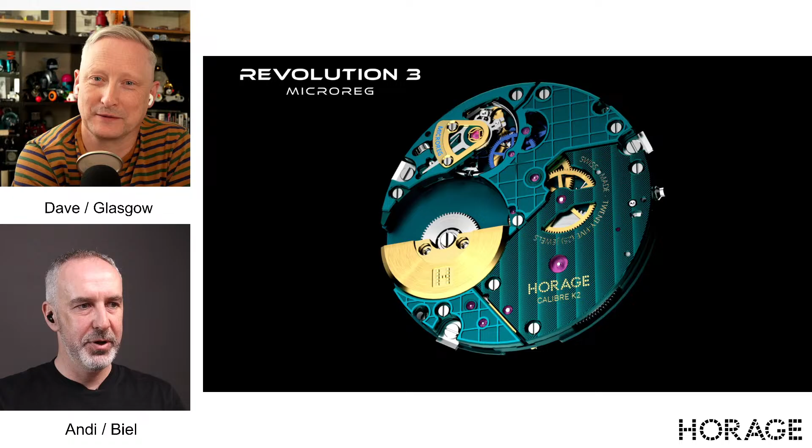So what do we overall look at today? I'm switching to the next slide. That's the watch I have here. You will see it live under my microscope camera. In the middle is this built-in MicroReg system, with this little prototype actuator. On the right side, we have a relatively mature design of the whole application, which you use with your smartphone - you put your watch on it and send an electric shock through the watch to adjust it as we want. Of course, you need to figure out first if the watch is off. We can't solve all problems for the rest of the world, but we can solve a lot of problems, I think.

Dave, how are you, you're in Glasgow at the moment? Preparing for our trip, I guess. Yes, we're getting ready to travel over to San Francisco to the Wind Up Fair, which is happening this weekend, Friday, Saturday, Sunday. We've got a few other little events planned in and around that main event while we're over there in San Francisco.

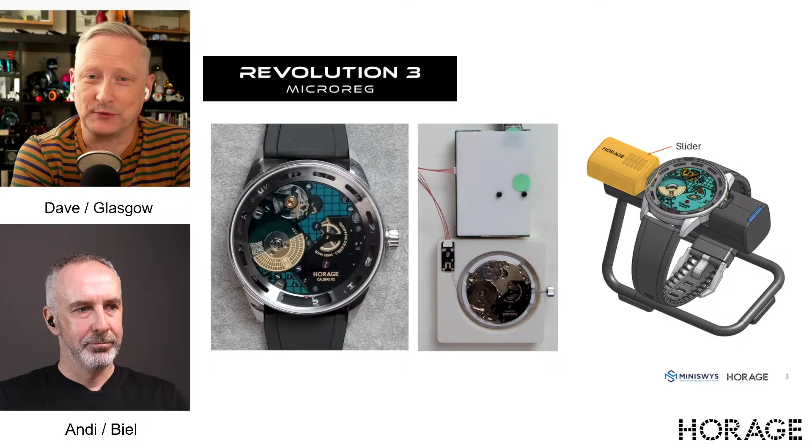But really today, what we want to do is get a good broadcast out about this update with MicroReg. As Andy said, we've moved on considerably in the last few months. We've been a little bit quiet, we've not said too much, but what we've managed to do is integrate all of the components we were looking to fully integrate into the K2 calibre. Previously, we demonstrated a proof of concept and a proof of application model, best described as a flatlay - it kind of stuck out the side of the calibre a little bit, but it showed everyone how it worked.

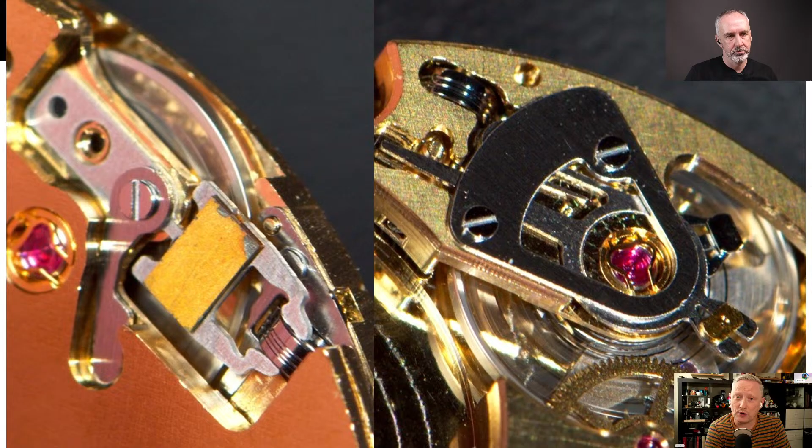We've actually been working hard with the engineers to fully integrate it into the calibre now as well. There's a couple of images on the screen of it. You can see on one side, the bottom, which is the dial side, showing the actual micro actuator - that's done by Miniswys, our partners in this. On the right hand side of the screen, you can see the new bridge piece, which will eventually have MicroReg wording engraved onto it. You can see the little swan neck regulator coming down there and the adjustment pin. This is all fully working.

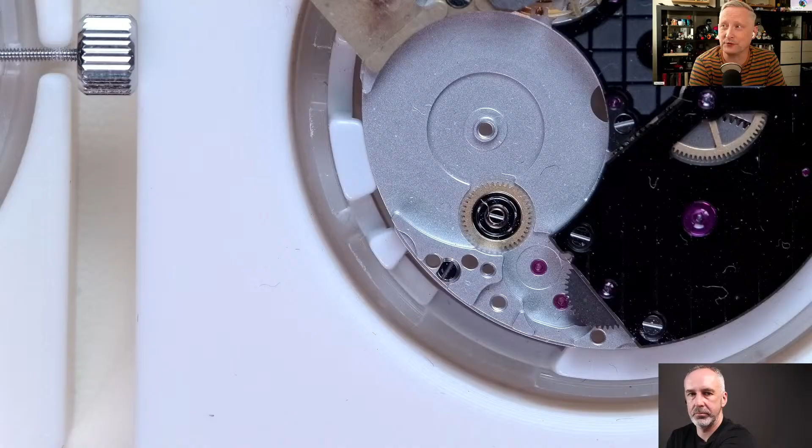When we first went live with this, which was last Thursday, that was around about a week after we finally got it fully up and alive. So it's just over a week old now, and it's running, but Andy has got the original concept here.

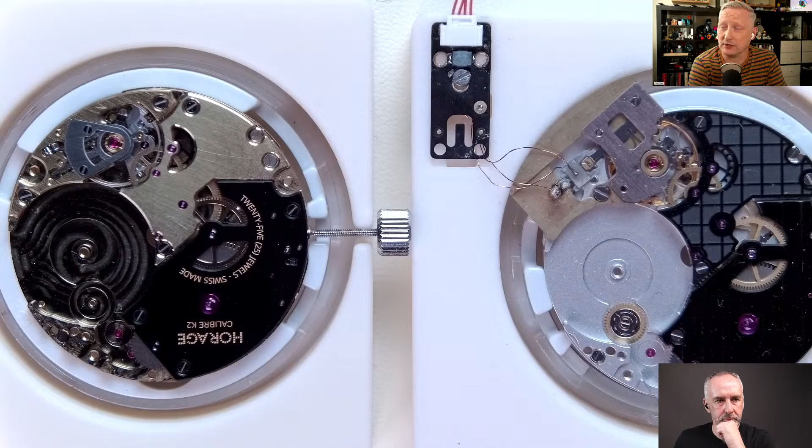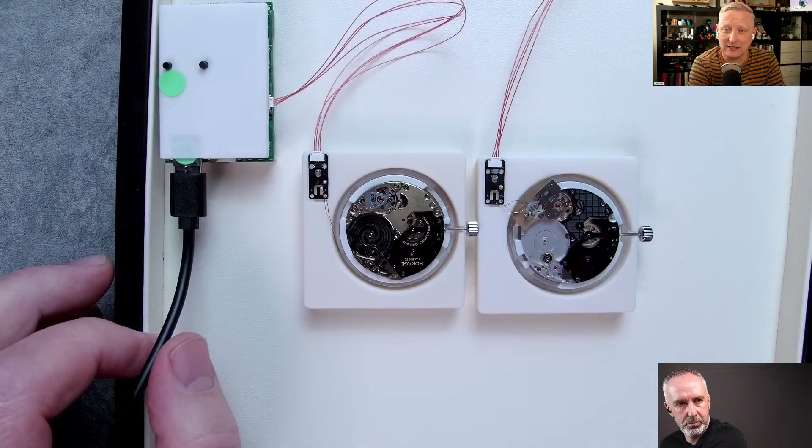And of course, with parts coming off design and being produced, we've got a few videos later to show some of those early components being made.

If my CPU can handle them. Let's not try and crash your computer. I want to be very careful with that, slowly, so we don't get kicked out, because I'm waiting for a new one. So what you see here, we're probably a couple of minutes late in starting.

This device up here is a prototyping device with a microcontroller connected to USB so we get our power. When I press that button on one side, it sends this shock as if it would come from external through a connecting system. Just for those who still don't believe it, there is no electronics in that whole system. It's pure mechanical magic, piezo ceramics moving around when they get a shock.

Best way to describe it: if you're looking at the movement or caliber on the left-hand side of your screen, the white square, pretend that's the case of the watch, and the tool up in the top left-hand corner is the interface which the watch sits on in order to apply the shock, which in turn makes adjustments to the regulation.

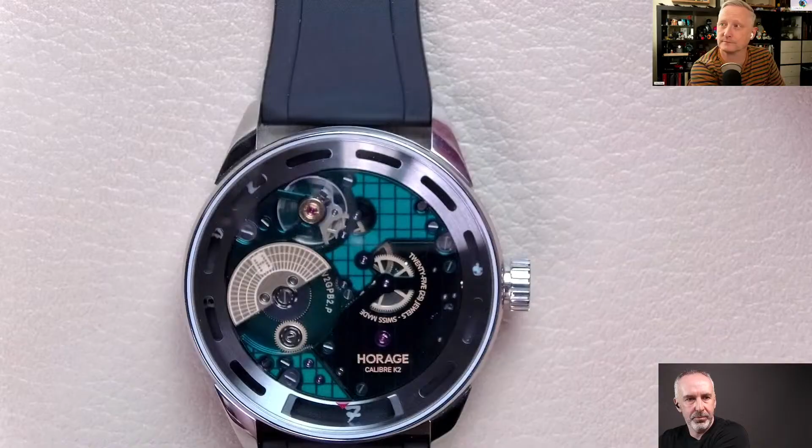That is, of course, not built in yet, because the main job right now is trying to figure out small details and improvements. Where do we actually have to have these cutouts? How can we make them bigger? Does everything fit in from the rear? Because it sounds like just a couple of hands and things like this, but at the end of the day there's still a lot of fingerprinting involved - sorry, let me clean that. These kinds of mechanical things need to work out properly, especially since it's always in daily use.

Here you can see this beautiful greenish-bluish finish, depending on how the light is coming. I think I have a little bit of yellow light here, that's why it's coming across a little more greenish. When you have colder light, it's more bluish. You can also look at it from a different angle here.

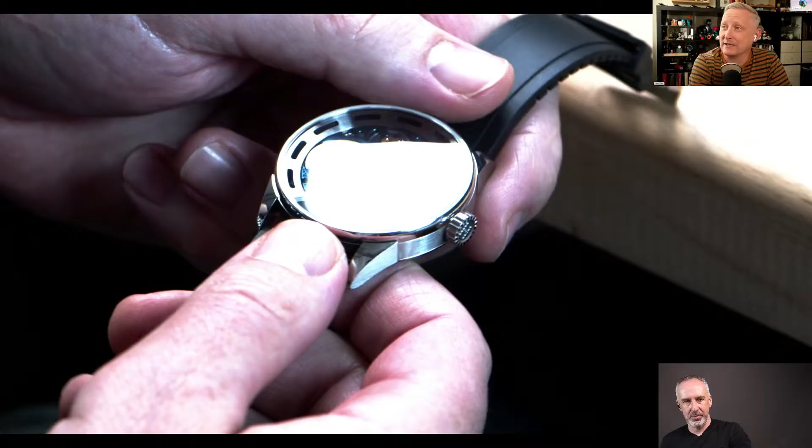What you're also seeing here is the second generation case. Here you see it's more bluish, depending on how you move it around - see the colors there, Andy? You're looking at the second generation prototype here. The prototypes we were showing earlier were the first generation case, but if you've got a keen eye, you may notice a few of the changes here.

So the interior rehaut ring, which has got these little cutout windows on it, is now in a mid-grey colorway, and it now has a nice angled slope coming in from the outer edge, sloping down slightly to the caliber, giving it a slightly more open feeling. The window at 6 o'clock, where you'll be telling the time, has a handwritten number 7 on this one since these are just prototype discs. We've now put a chamfer on either side of this window, which helps open it up, making it a little more visible.

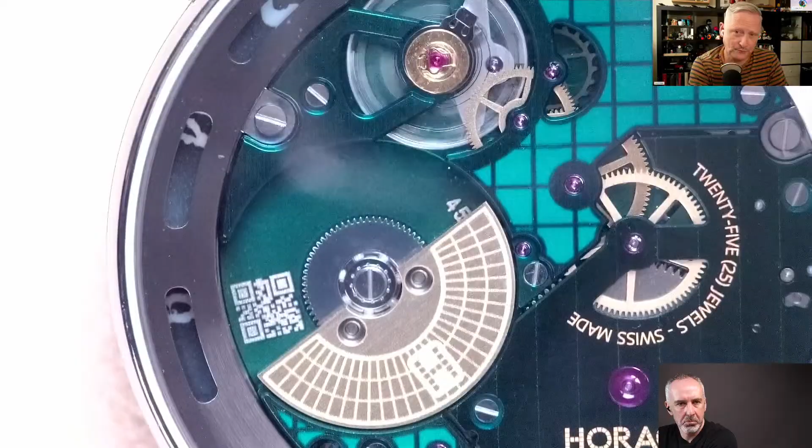Andy did mention earlier, we now have received some of the second, third generation prototype time discs, which actually have the minute markers and numbers printed on them. That will be in a future live we'll do probably in the next couple of weeks, once we get these built into watches. Everything about this has everything you'll expect to see. So these are getting, I'd say, 97, 98% towards the final aesthetic image.

I see someone's actually said in the chat - VW Westphalia Synchro says the rehaut looks so much nicer. Yes, we all agree, it is. We felt the first one was a little bit cumbersome, it wasn't quite as refined as it could be, and it's definitely getting a little bit more refined as we move on.

The next prototypes in the cases will, of course, have the touch points on them that will allow the tool to touch the contacts on the case to allow that resonant frequency shock to get through.

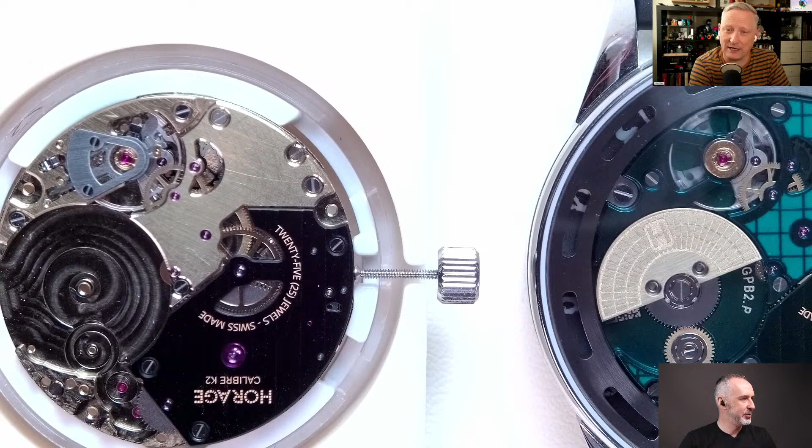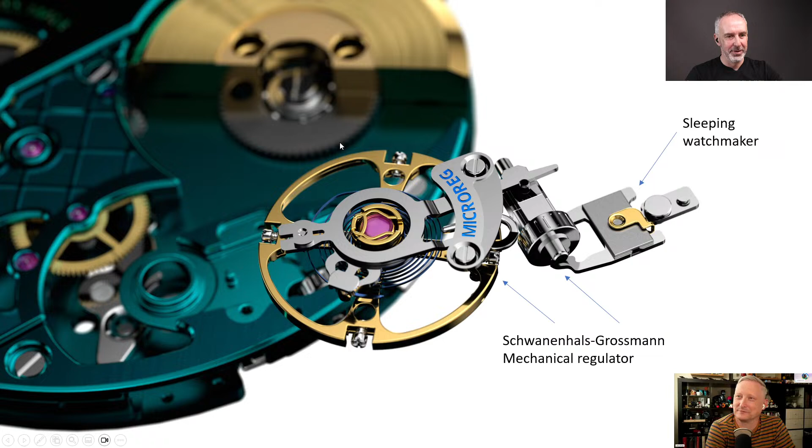So we are all interested in seeing how that really works. Let me bring up some - I think the first time in standard movement, first shot, is interesting. Let's do that. No, I actually opened the wrong one, I think. But we shouldn't be that picky now. Need a little loading here. Coming in a second, yes, let's not crash the computer. Yeah, we also have sound there.

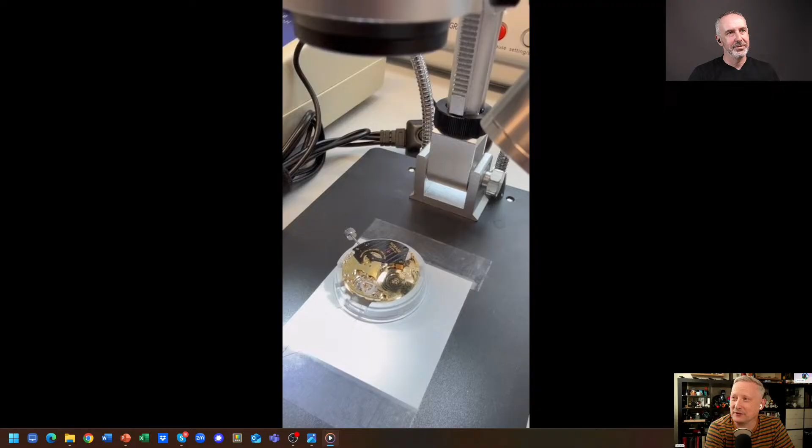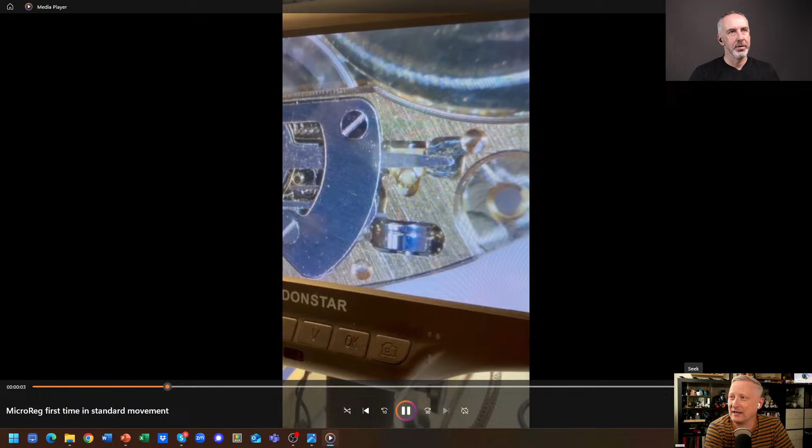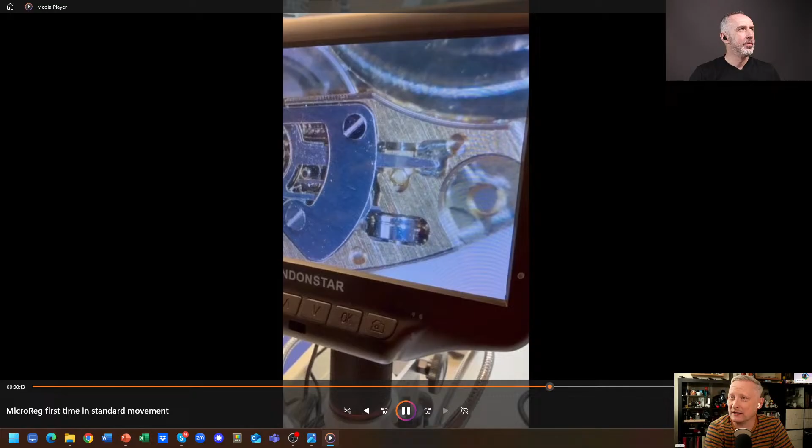Here we go. So what you're looking at here is the screen of the microscope with this movement underneath it. This was on the day it came alive, and you're effectively looking at the backside of the caliber. You can see in the middle of the screen, pretty much bang in the middle, that little pin, and then the little round gold pin just underneath it - that is the part that is moving. You can see it moving now in the video, and below that you can see it will move up and down, either adding or removing advance or retard within the actual movement.

I actually have another one of those videos. Let me just - I just need to, I figured something out. I need to open those videos with photos and not with video, because then it draws less CPU. Doesn't try to kill your computer.

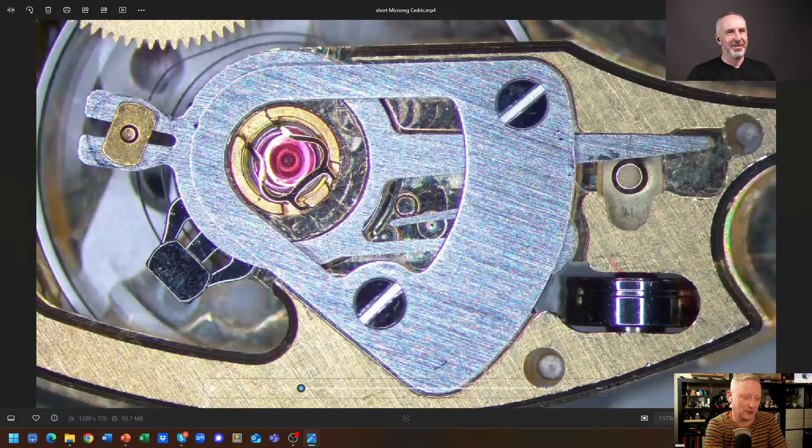Yeah, here you can see it much bigger style. So just on the right hand side of the image here, you can see that pin, and you can see the swan neck regulator, and you can see that moving as well. Yeah, so there we go.

And this is all being moved by receiving that little resonant frequency signal. Two different signals, one to command advance and one to command retard, which will then have the effect to move that swan neck regulator, in order to be able to make those adjustments to the regulation.

Now what you're seeing here are quite aggressive movements. Each individual movement in the final product will change the regulation by 0.1 second. In the case of this, it moves quite a lot. These are quite coarse movements, but it means that you can actually see something happening. If it was just to do the 0.1, you wouldn't see anything happening.

Exactly. We're not exactly sure how much these individual swings are, but these are probably in the 5 to 10 second per movement adjustments at this point in time. And now what we're doing is working with the software in order to refine the control to allow us to make those extremely fine adjustments.

I think I would like to show a little bit how the mood was when it first time did what it should do. I have a couple of pictures here. It was really, you know, these kind of things which happen not every day in a company's life. When you put something together, and in fact, for me, I would say it's 10 years.

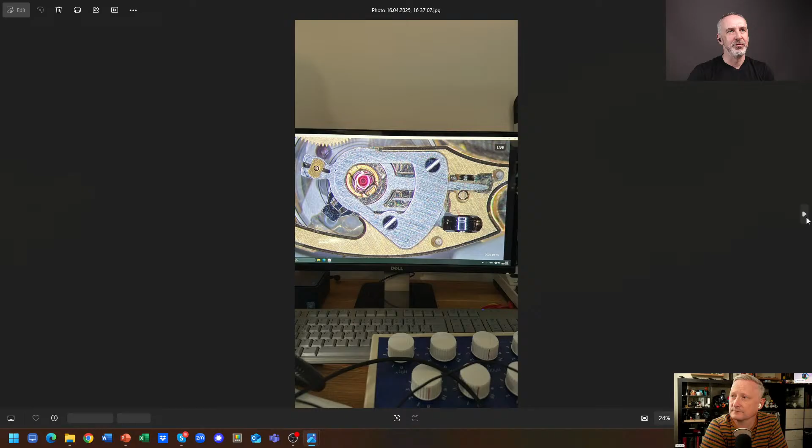So everybody was there. And of course, we took a lot of photos, that's Francesco from Mini Swiss and Cedric, some of the core team members who tried to get stuff going. And that's one of these shots which I just showed you. So that is really, when that was, all the crowd was around.

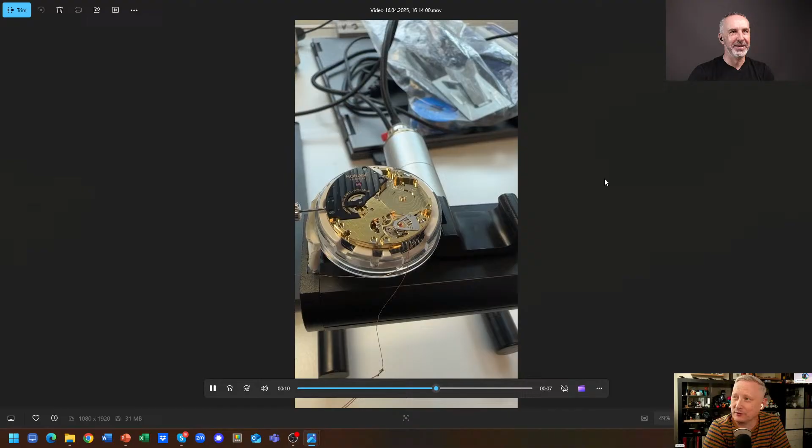This was the video of when it was happening. The video is a little bit shaky, but this is when we were literally witnessing it coming alive for the first time in terms of coming alive in the fully featured built-in package.

One of the questions being asked actually is how many seconds is it spanning? Obviously, we already produce our caliber sets to run within COSC, and the vast majority of them are also COSC certified individually, which of course means the -4 +6 second range. That in itself is already a fairly significant challenge to get your production calibers all running within that spec. You have to be producing very well-made, very high tolerance parts in order to achieve that. This will allow you to make adjustments probably around about a 10-second window either way.

I have some things here. What are you doing with the broomstick here? I said when this... Andi, so that was a very interesting situation because I said, German or English? We just let you hear it actually. I think it's spoken in German. Okay, what are you doing with the broomstick here?

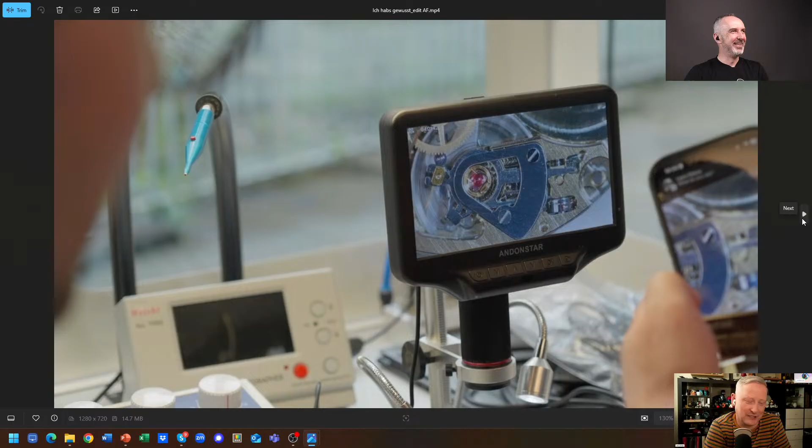For all the customers that have supported this project from the start, whether with supporter vouchers or being able to pre-order one of these watches - hopefully this gives you even more confidence that this is real, it is coming to life. For anyone waiting to see how it develops, hopefully this shows we've really moved forward over roughly the last 6 to 9 months since we announced this project. This is where we're at now.

In typical HORAGE fashion, we are running ahead of the curve - slightly ahead. We want to still have a bit of conservative nature about us, just to make sure other issues don't come up. The next big challenge is getting the software stack for the tool ready to make those fine adjustments.

Andy's now zooming in on one of the movements live here to demonstrate. Is it powered up, Andy? It should be - at least it was operating before. I just wanted to show it. Oh, I didn't wind it - do I need to wind it, or is it okay? I think it's okay, the balance doesn't need to be running.

Andy's going to apply it now - there we go, that's Andy applying the frequency to it, and you can see it moving. This is being done in real time as we're pushing it out. You can see the pin - the highly polished silver wheel has a little red dot that's just come into view. That part is effectively turning in order to push that little pin against the regulating arm. The MicroReg actuator is tucked underneath the balance, on the back side.

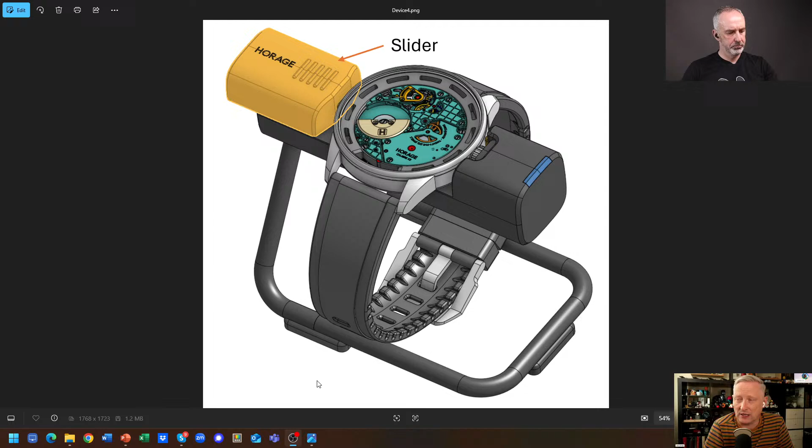The tool itself will also have a microphone built in, which wasn't something we originally envisaged, but that microphone will allow us to take note and registration of exact parameters of the watch, allowing us and you, with the tool, to make very precise adjustments to the watch in real time.

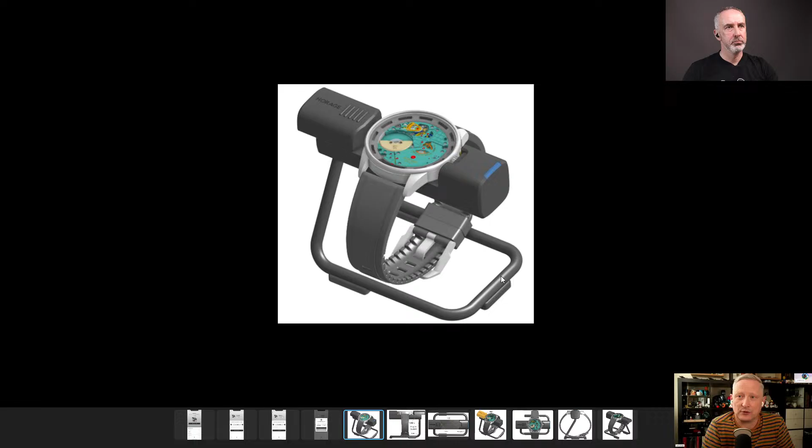So basically that's how it looks here. Someone's asking: will you keep some form of dot indicator so we can see the adjustment working? That's something we haven't looked at, but honestly the app is where it will get the information - it will register how much it's been moved, in which direction, and you'll have effectively a log of information dictating what is being adjusted.

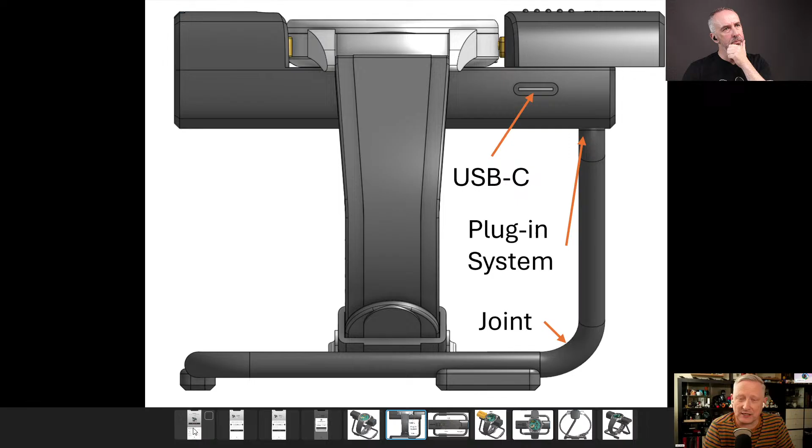Even if we were to put a dot or a mark on that wheel, the reality is it moves such a small amount that it would still be almost impossible for you to determine whether it had or hadn't moved. What we need is a software system that registers the applied frequency to move it in a specific direction for a given amount of time equals a given amount of adjustment, but all of that information will be logged. So you will be able to keep a document to prove or to show what has been adjusted.

It's also for us to figure out, well, not for us, I mean for you. There's no server-sided exercise, but in the long run it is interesting for optimizing further chronometry.

If we have the data available, you can see what you have been doing. In this device there's currently effectively a motor controller and a microphone which is collecting sound on one hand, and is creating the electric shock in the form of a 3 volt 500 kilohertz signature. Then the app is controlling the motor controller in order to send that, release the shock, and also collect the feedback.

The data is pre-processed in the phone, because when we listen with a 192 kilohertz microphone, we have a lot of noise, so we need to clean up that noise and figure out what has been adjusted, if it has been adjusted, so that you know, because you cannot see it, it's too small to see. So we need to have the audio involved, and there's some serious computing needed, and that's why we decided to go with a phone application, to use the computing power of the phone and not need to put some stupid buttons or extra display on this device.

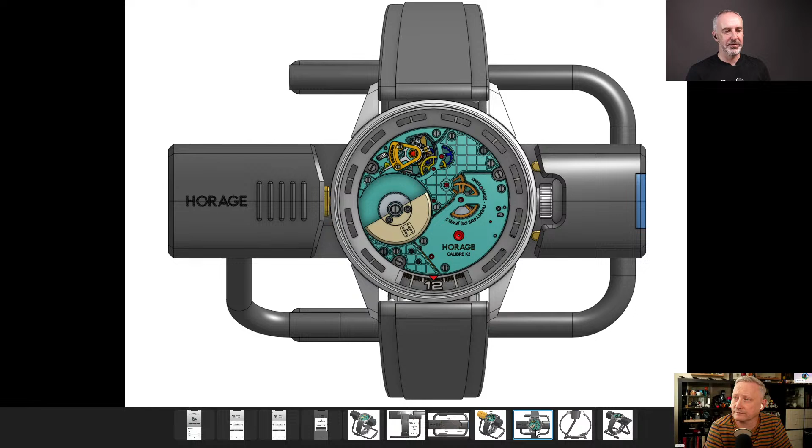So very happy with that. You see a big change from what people saw in our CGIs, in our early concepts, because we have done some tests, mock-ups, and figured out, can you put that thing on the watch, or the connecting spots should be opposite of the crown because it's more user-friendly. So we built in a little plate where we connect the outside to the inside. These are the things which you start thinking about.

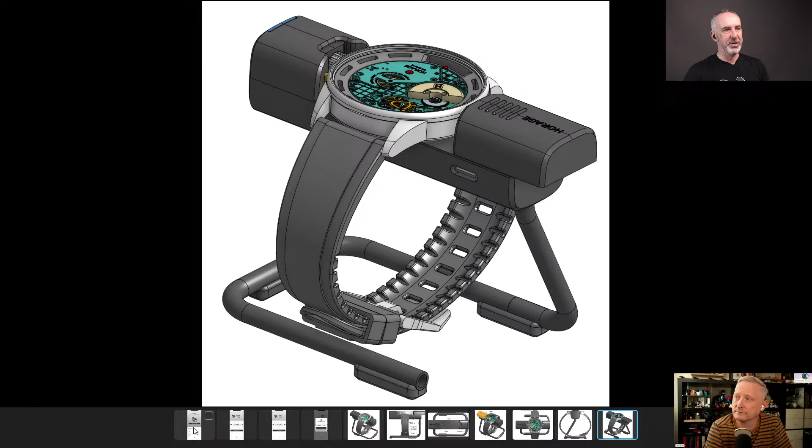And what people don't know, we have a relatively large software team operating out of Taiwan, our Profit Digits friends who build software for us. Also when people buy a watch, they very likely buy it through our software application. They are also in charge of building this HORAGE app MicroReg version.

It is primarily dedicated to do that. And there you have different, we are logging the amount of adjustments you have been doing. You can name them yourself.

As I said, there is no hardwired or remote wired server exercise needed. Even if there's no internet, that doesn't matter. You can use this phone as an extended computing device in order to power our device. That's pretty much it, and primarily that's because otherwise we would have to build all of that computational power into the tool, which of course makes it a very complicated and expensive tool.

The idea is the tool itself will have the minimum number of functions and technical features that it needs to work, and then it leverages or utilizes the CPU power of your phone. It's not being used as a communication device, as a storage device, or as a transmission device.

It's merely been used for its computational power, so no fear that we are snooping. None of that's going on. It's all just being held on the device itself.

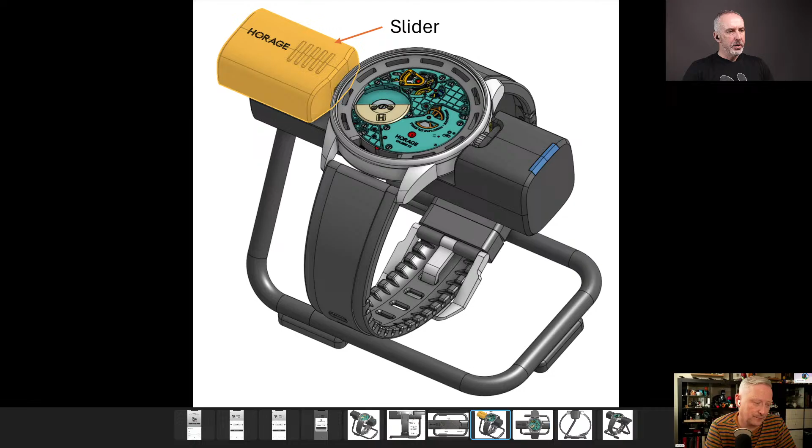No, we didn't have too many slides this time because we just wanted to primarily show things happening in real time. I think I showed that already. As I said, it's hard perhaps for externals to understand how important this is for us as a company in making movements. Next steps are just to continue to work on that, make more of these early samples. I think in probably 3 weeks, Silvan is confident he can put it into the watch. We're still discussing with the case maker about the connecting plate inside, how to fix that and how to make it easy to assemble. I have actually a couple of other slides, by the way, which might be very interesting for people to look at.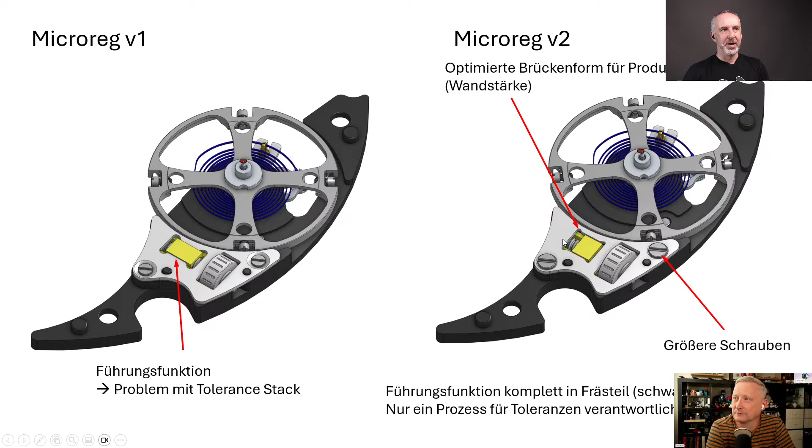It's this kind of version 1, version 2 transition thing. I think people like watching technical things, so I can do that - probably a couple of slides to see the challenge coming, version 1, version 2, where are these small details? Of course, it's written in German, but it basically says the screws were too small here, we needed bigger screw heads in order to be more defined. We needed to optimize that shape in order to make it producible. So these are version 1, version 2 questions, and that is some really very small stuff.

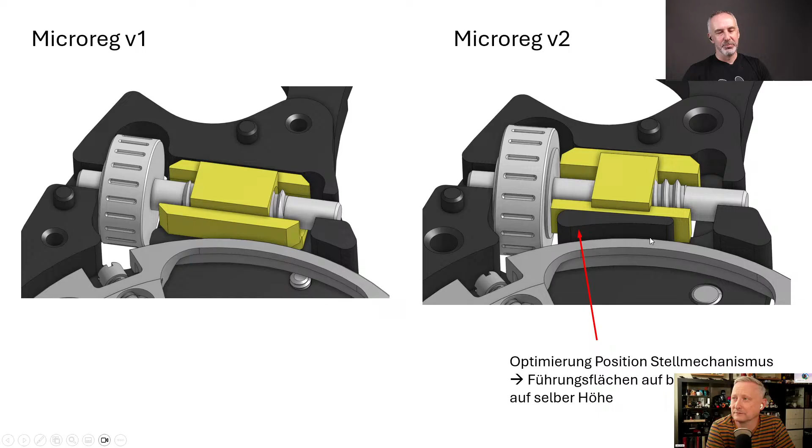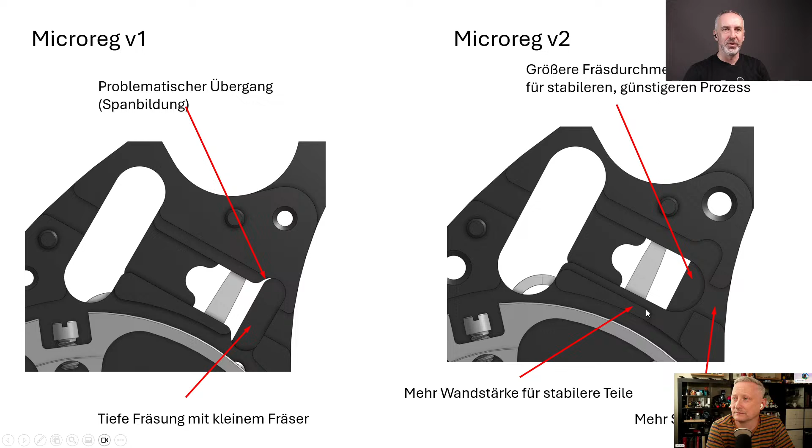The slider or the runner, how you call it - can you actually machine that? Is the positioning mechanism correct? Because we are not allowed to have any play in there. Small details like that, that's a typical machining experience question. We don't want burrs, we don't want too small reamers. If we have that, we need to make sure we get rid of it. We have more wall thickness in one area or the other. So all these small details keep us continuously repeating the design stage in order to get better and better prior to making stuff.

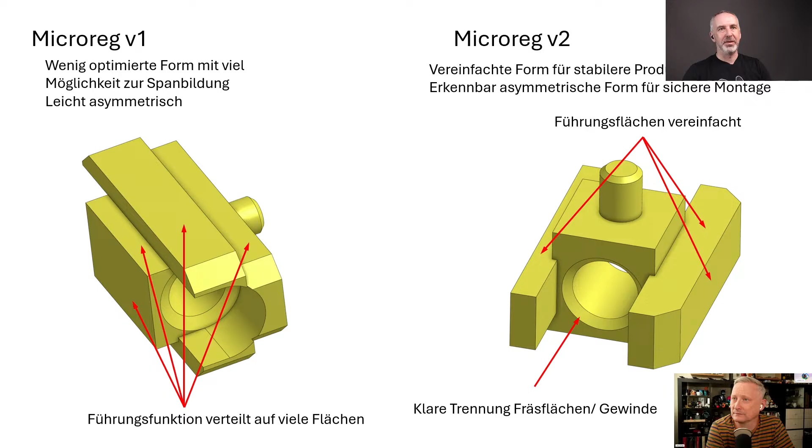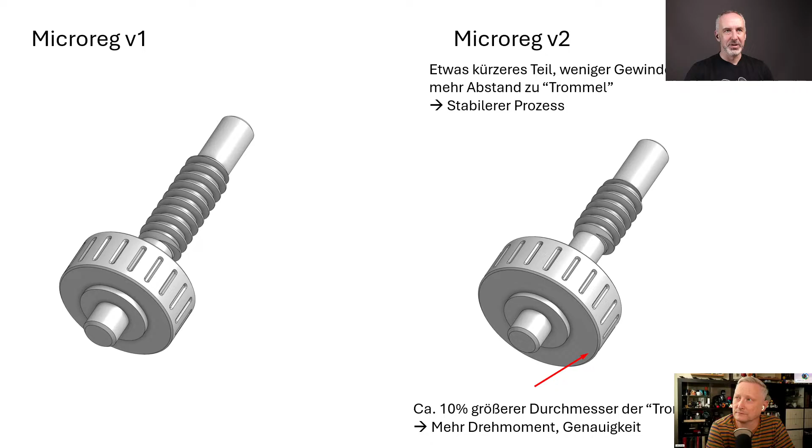And that is something I think in today's world, as I said, we are the tech guys of the watch industry. I would say we are using first-class engineering, advanced computing technology in order to make our stuff, combined with a lot of experience of 15 years of making parts. If you don't have that, you are going to need a long time, and not as we did, less than a year, to get to something where I always said okay, that should be the final outcome, but it works faster than we thought.

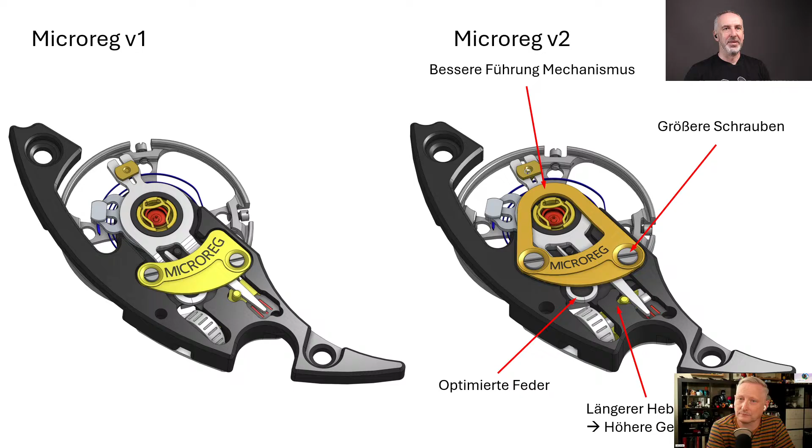So there's many, then these springs, optimizing that spring. Why is that spring there, by the way? This kind of swan neck needle - we don't want tolerances. We can't produce as precise as we want it, so we need to push the whole system into one direction, where during manufacturing on one side we can be 100% sure that this is the zero spot of the whole system. So even if you get a shock, it will move into the original position. These are things you learn when you actually do that stuff.

That was probably one of the most tricky things here. I mean, this was the first thing, easy - everybody says there's no problem, we make a couple of plates there and connect something. But when you think very hard, you think about, okay, that's a mechanical movement. We need to make sure that this mechanical movement can be disassembled by a non-professional, non-HORAGE person in 100 years from now and put back together, without having to solder or glue anything. So that is some serious challenge. And so the first thing looked cool, but basically, you can't do it like that.

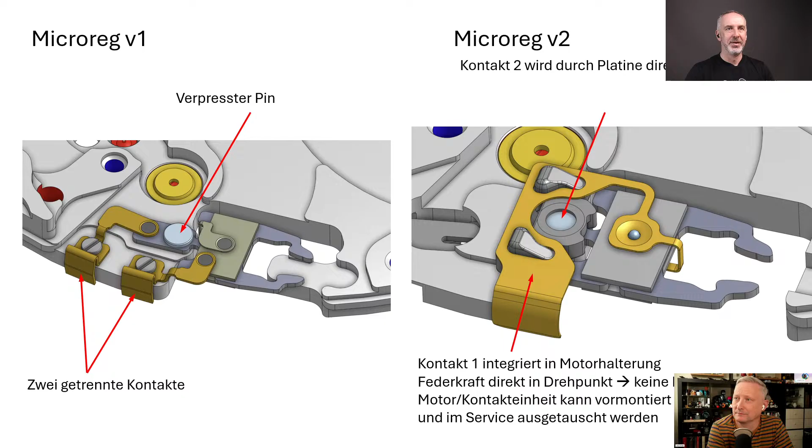And then we were trying to get our head around how do you actually connect something without the watchmaker having to do permanent fixation operations, because that's what we don't want. So there's a lot of traditional watchmaking thinking behind that, even if it's just a little bit of a plate. Or even the worst challenge actually was, how do you fix something with a screw without actually applying torque, because that actuator wants to be perfectly straight, and that perfectly straight actuator wants to be there also when someone else has taken it apart. So somewhere in a store or with a watchmaker, the people need to be able to put it back together without our assistance or without specific tooling involved. That was our goal, and I think we achieved that goal in the best possible way.

You might think, oh, that's how it is now. No, of course, there's version number 3.

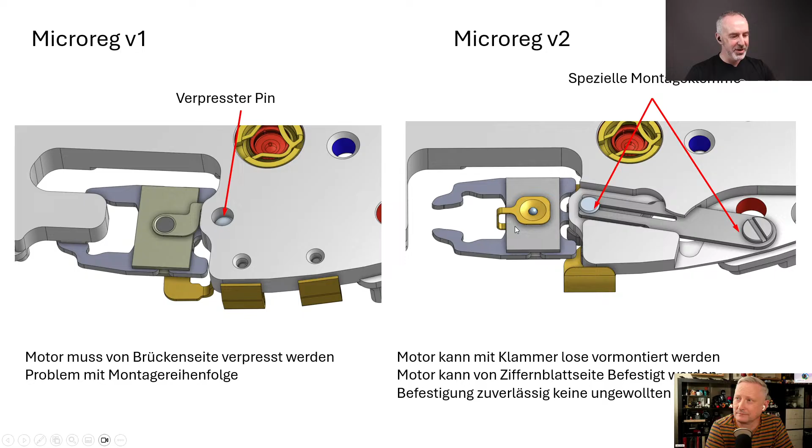And the version number 2 is the one which you saw before on that slide, so you can compare that again.

That obviously from the rear looks a little bit different, and out of a sudden Silvan and Marcus came up with a cool idea and said, yeah, that's how we could actually, with a very simple way of fixing it into that movement and holding the motor in the right place. So just that you get a little bit of an idea of how much brain exercise actually goes into that whole thing.

Yep, the smallest parts, and sometimes what you believe are the easiest parts to solve turn out to not necessarily be that way. That is usually the problem within watchmaking.

Do you have the wee video, Andy? We had the little video, obviously, of that first component coming off of the lathe as well. Yeah, let me show that. That's definitely worth seeing, some of these parts, to give you a kind of idea of scale of some of these parts. Wait a second, you just continue talking a little bit.

Yeah, I will continue. So the whole team has been working hard on this. The next steps are going to be obviously having a case with those contact points integrated into it so that we can fit these calibers into it, and then see if we can still make the adjustments by just applying the tool to the touch points on the case.

At the moment, all of the tooling is being directly connected to the contact points on the caliber. We now need to make sure that we can fit these calibers into a case and that everything lines up so that when we do touch those contact points, then everything comes alive at that point as well.

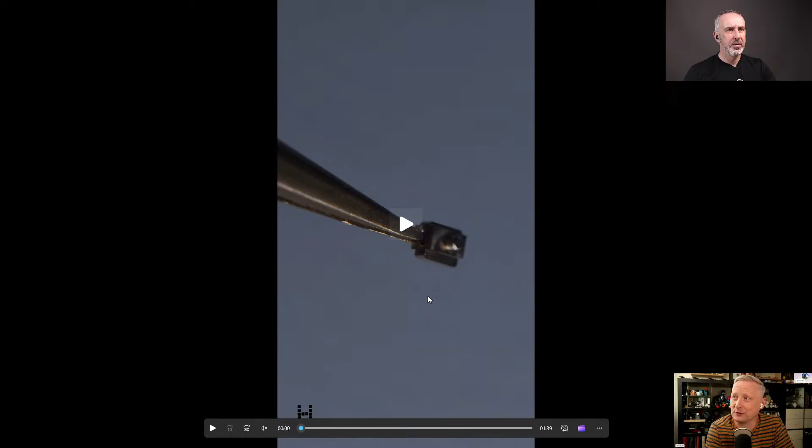I have no that. Here we go. Andy's here, found the video. It's just coming on now. So that's the tip of a pair of tweezers. This is one of the components of the MicroReg assembly. So Andy will now play the video.

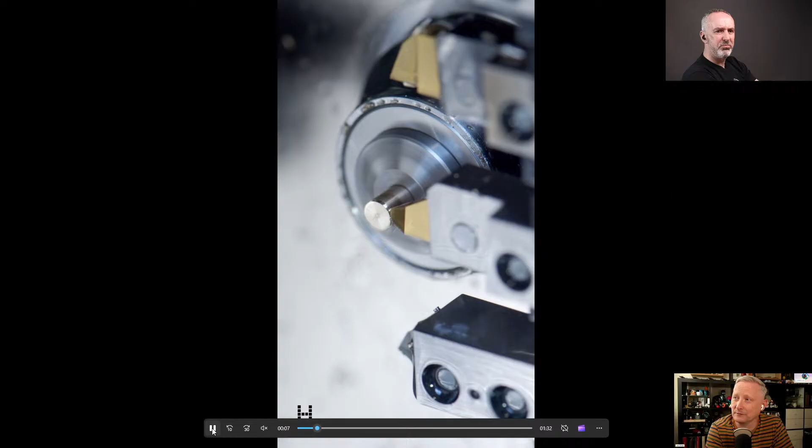Yeah, I muted the sound. I mean, you can see it in our Instagram, I think, or something like that. I think it's been on Instagram stories, yes. Yeah, I think it's been on both.

You have to imagine it's insanely small. And the cool thing is, in the beginning we thought, okay, we need to do that outside, we need to go to a manufacturer, and then Jörg said, no, just try it. We use our Citizen R04 lathe, which is equipped with a second spindle and which can actually machine this little part, actually it's a runner screw. The correct term, I think, is a runner screw.

Leo was freaking out because it's so small, it's hard to film that thing on this machine. So basically, besides some flat parts, we are able to make these parts also inside of our own facility. And it's fascinating. There it is, cut off. That's how it is, that's it being taken out. There we go, cutting clean.

And on to the next one. Yes, that is a tiny component being made on not such a tiny machine, it has to be said. The machine is rather large, it would not fit in your average living room. But yes, that is part and parcel - big machines making very small, very high precision parts.

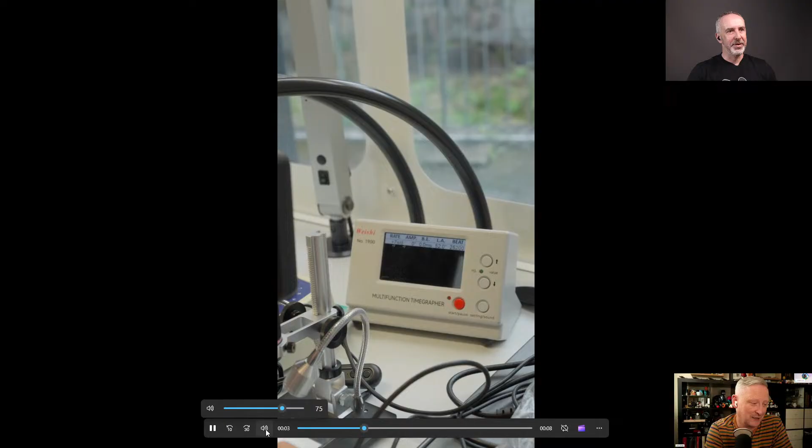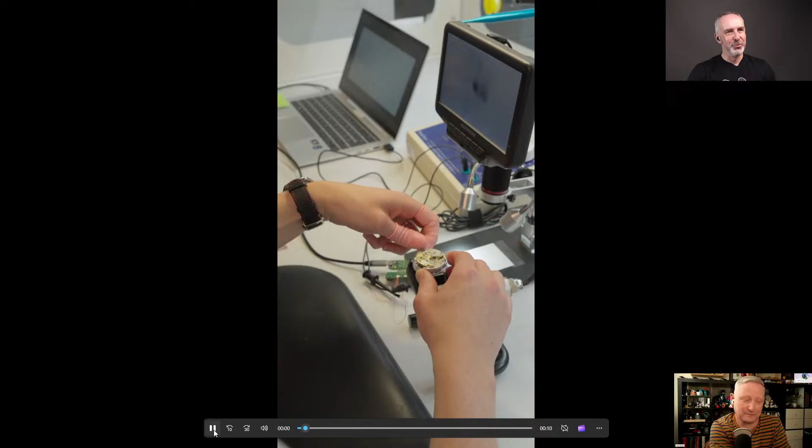So I think that's us coming into rounding up everything we wanted to talk about on this. I think it's interesting to hear something that actually ticks its way - we're not just making nice movies on stuff which doesn't do anything. We are effectively already figuring out what it's actually doing. There will be a lot of work going into control algorithms, control mechanisms, figuring out what actually is really happening in there. But the good thing is...

That part of the product is something which is an ongoing improvement, I would say. That's the nature of software - software allows updates without having hardware around. And I hope we are getting more and more sophisticated over time, understanding all these regulation mechanisms and what actually happens in there. Having a lot of customers out there who contribute to what we do is very helpful at the end of the day. I wouldn't say you're guinea pigs, but we need first products on first wrists in order to get enough volume going and really understand and be able to scale the whole project.

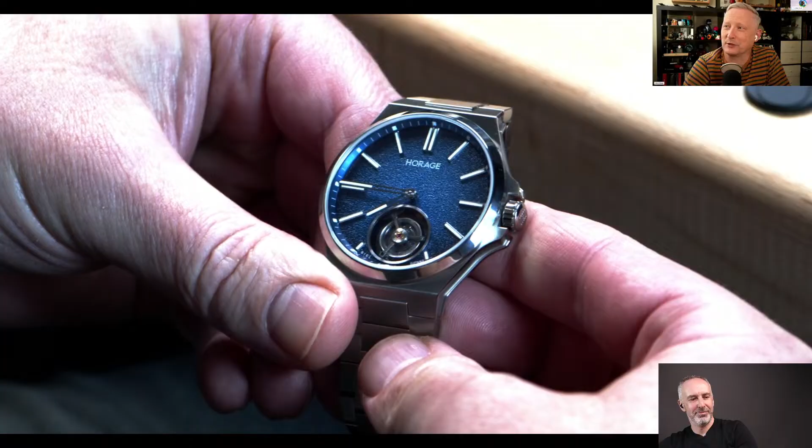Anyone following us knows that one of our other big projects was Mission Independence, which was the Autark Tourbillon. This was the combining of our hand-wind tourbillon caliber with our K2 MicroRotor, which resulted in the KTMR, the MicroRotor tourbillon caliber, and the first watch to feature that being the Autark Tourbillon.

We delivered all of those pre-orders by pretty much the end of 2024, and we've just had a slight refresh. We've added in one new dial, that being this galactic blue. This is using a similar grainy effect on it to the gradient grey dial, without the power reserve this time, and in this really beautiful deep outer space blue on there as well. It's an amazing dial, I agree.

Well, good. I think that's a good end to today's show, I would say. Absolutely. So thank you all for joining in. And we will... Oh, Andy's coming back. No, we want to end with something. How do we want to end here? Techie, do we want to end techie? Okay, good. No, I probably we do it like this. You know, I want to see you in your full glory.

One last question - I think it was Matt asking, is the watch titanium or steel? If he's referring to the Revolution 3, it is in steel. If you're referring to the Autark Tourbillon we showed at the end, that's in grade 5 titanium.